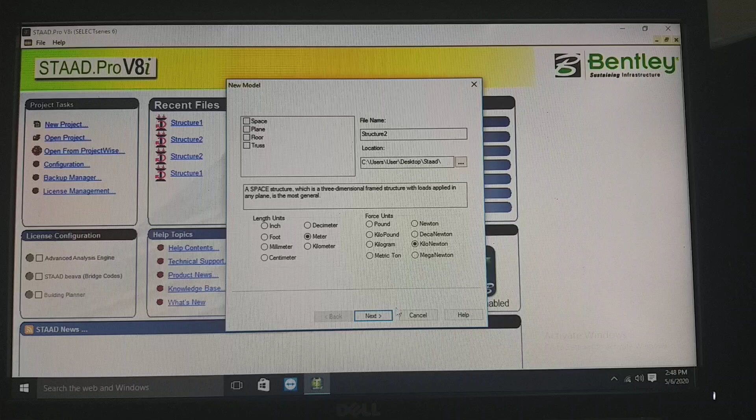First take the software STAAD file, new, we'll name it as structure 2 and save it in the same file which I have saved earlier. Change the units to meter, kilonewton, and take it as plane. Next add beam, finish.

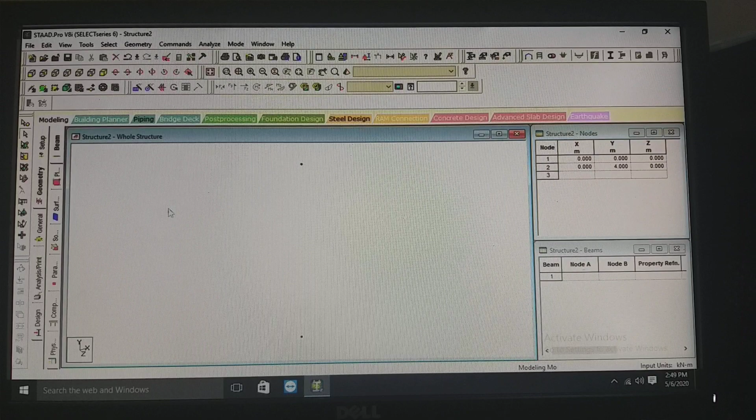First we'll add the nodes, at 0, then we'll add the second node at 4. Coming back, add the beams in between these nodes.

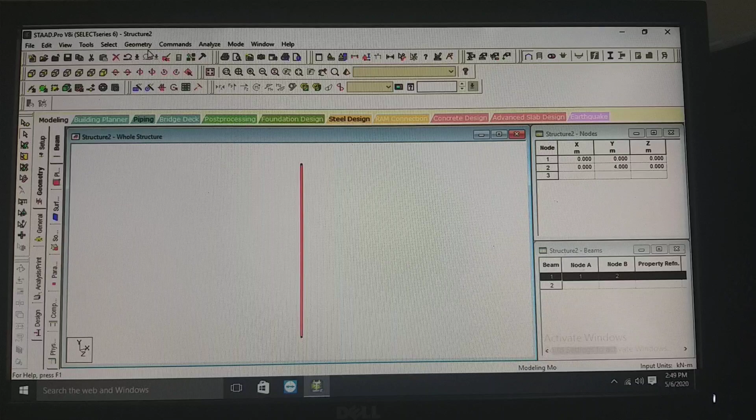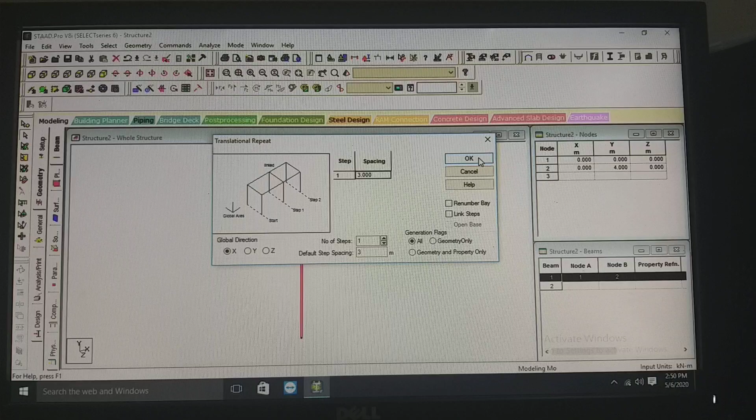Now in order to make this a portal frame, select and move on to the geometry where we have an option called translational repeat. Select the direction along x direction, the distance is 3 meters, number of steps in this, the spacing is 3 meters, default spacing 3 meters, number of steps 1, and give OK. So we get another node moving along the x direction.

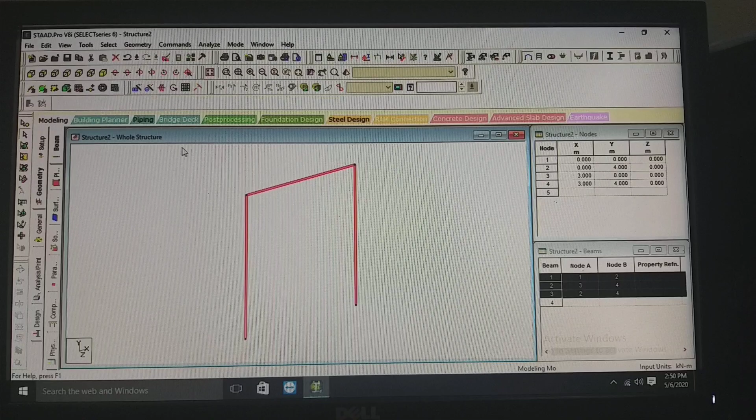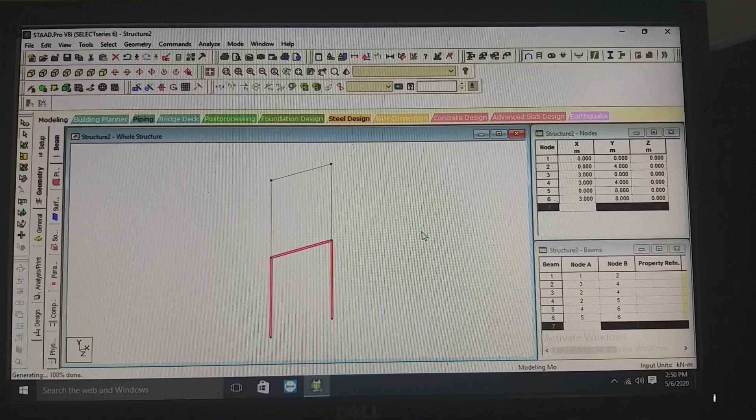Now join these two nodes, then select all 3 beams, use the option translational repeat. We'll move it along the vertical direction, that is along y direction. The default spacing is given as 4 meters, number of steps is 1, give OK. So you get another beam, another frame.

Now we have completed the geometry, then moving on to the general. First is the property, we have to define the property. So define a rectangular property, we'll have two different properties here.

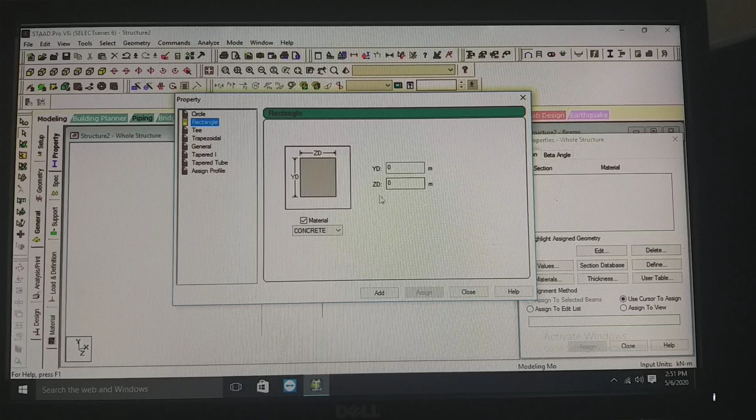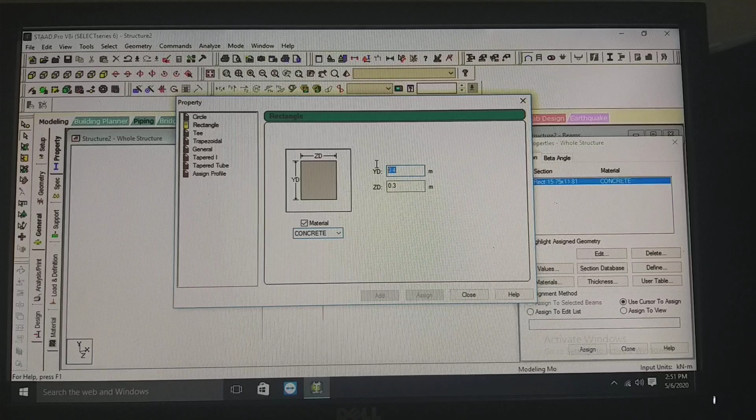First the rectangular property in which depth is equal to 0.4 meter and width is equal to 0.3 meter. Add another beam with depth equal to 0.6 meter and width equal to 0.3 meter. Add. Therefore we have two sections.

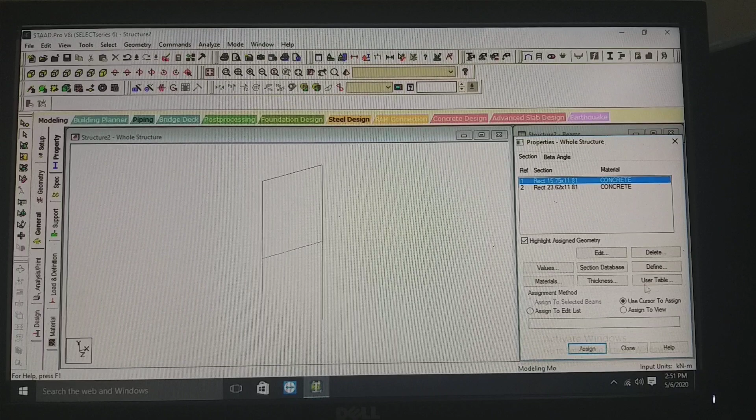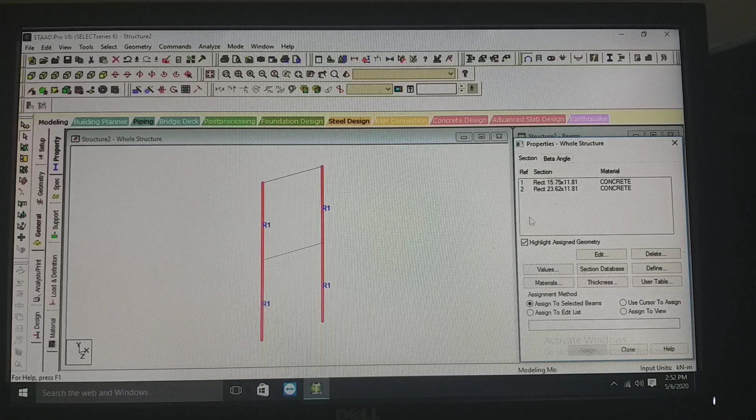First rectangle, that is the first section, we'll give it to the columns, that is assign, use cursor to assign for the columns. Then select the next one, will assign to the property, the beams we assign, use cursor to assign. We have assigned for the columns and for the beams. So the sections are over.

Now this is specifications, there is no particular specification. Moving on to the support.

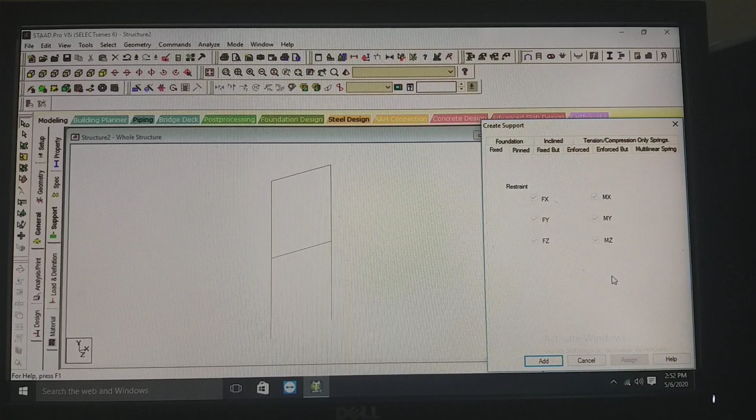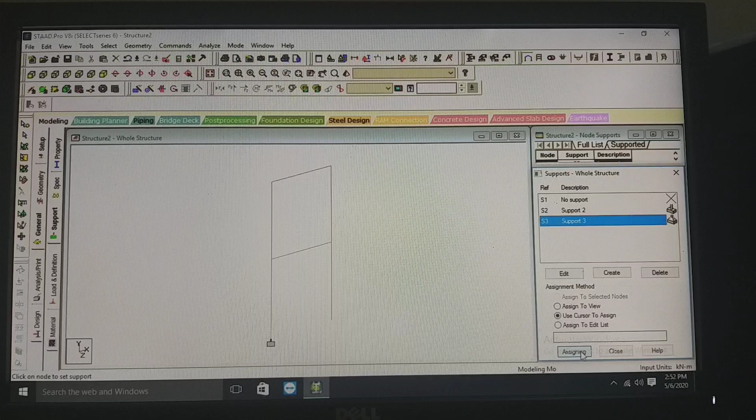We create two supports, create first a fixed support and next a hinged support, that is pinned. Add. So first is a fixed support, assign, use cursor to assign, that is a fixed support, and the next one use cursor to assign, that is a hinged support.

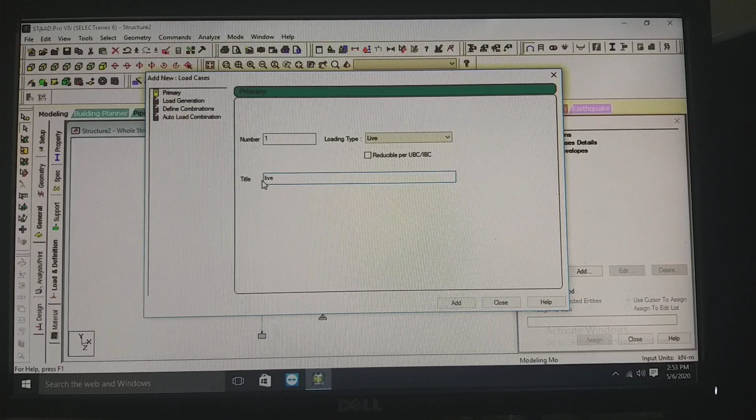Now after the support definition, moving on to the load and definition. So first load cases, add. In this, let it be live load. So we'll have load case 1, marked as live load, mark it as live. Add, close.

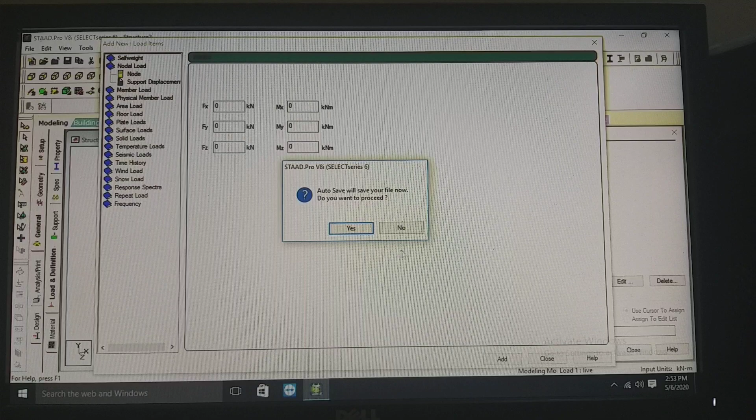So in the live load, add. First we'll have a nodal load, that is here we'll have a horizontal loading at the nodes. So in this case horizontal is Fx, Fx positive direction. We'll have a 20 kilonewton load, and we'll have another one along x direction, 10 kilonewton load.

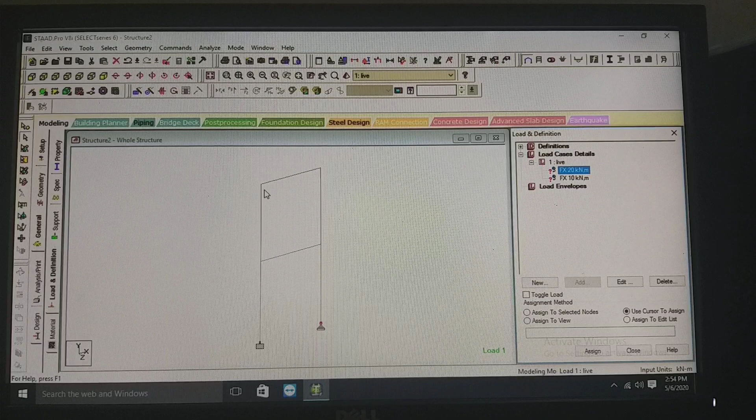And so we'll assign this first. Fx is equal to 20 kilonewton at the top node, and Fx is equal to 10 kilonewton at the bottom node.

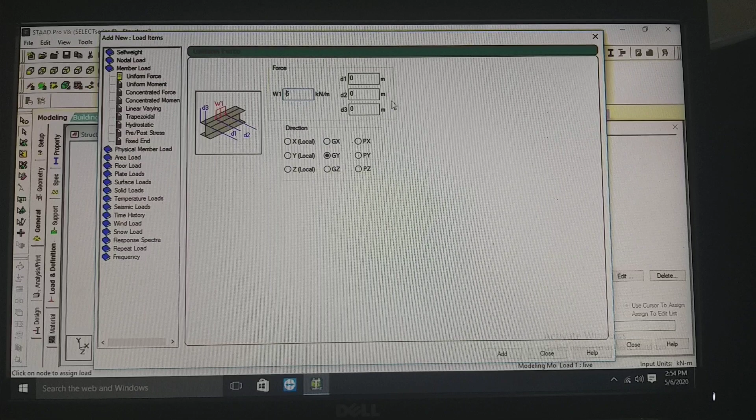In this case itself we'll define another load which is called member load, or you can assign a uniformly distributed load here, uniform force. Let the uniform force be 5 kilonewton per meter, and let it act in the global y direction, vertically downward, so we'll mark it as minus 5 kilonewton per meter. So with that, add the load.

Now assign this load at the top, use cursor to assign. So we have assigned a uniformly distributed load at the top member. So with this we have completed the loading assigns.

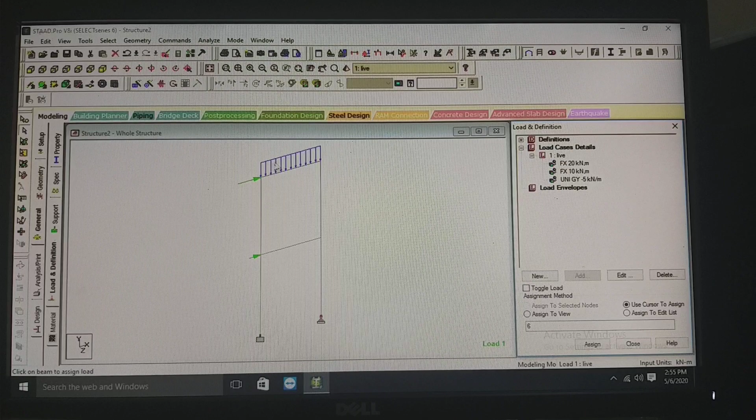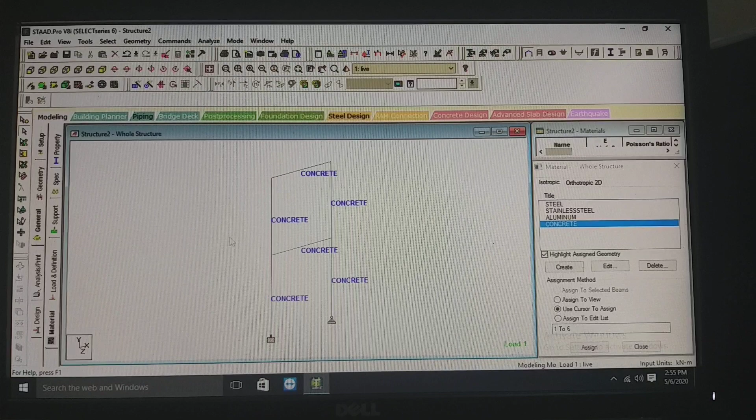Now moving on to the material, it has been defined as concrete. If you need to change the concrete, we can move to the concrete and edit the values, that is you can edit the compressive strength. For the time being, let that be the default value. So with that we have completed the section properties and the inputs which we have to give.

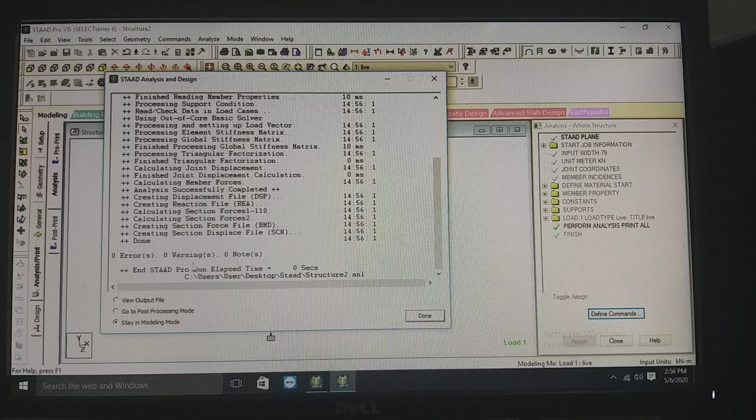Now moving on to the next one, analysis/print. So print option, print all, and so with that the analysis print option is also given. Now moving on to the command analyze, run analysis, save the structure, and we have seen 0 errors and 0 warnings. So staying in the modeling.

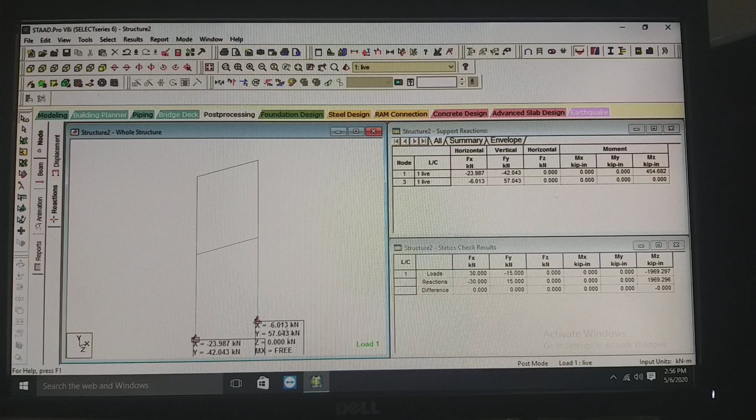Now moving on to the post processing, you have only one load, so you can see the displacements. The values are given here, horizontal and vertical displacements at all the nodes, and you can find the reactions on all the nodes where the supports are there.

Then when we go to the beam, we can find the Fx, Fy, Fz, that is the forces and the moments in the beams. And when you move for graphs, you can get the values of the bending moment, axial forces, shear forces, etc. for all the beams, that is for beam 1, for the 2 beams, and we can get the values for the columns also.

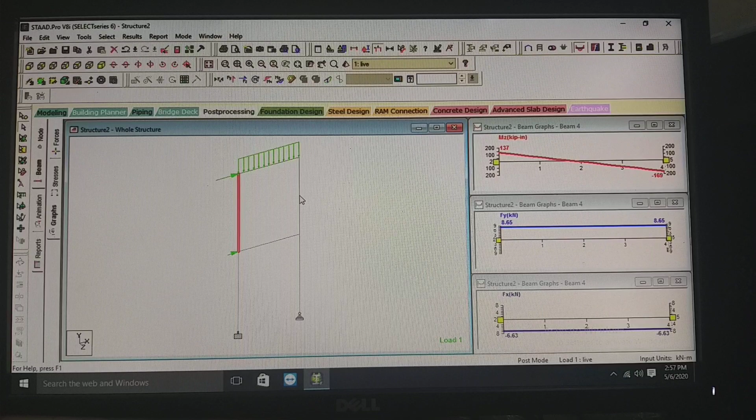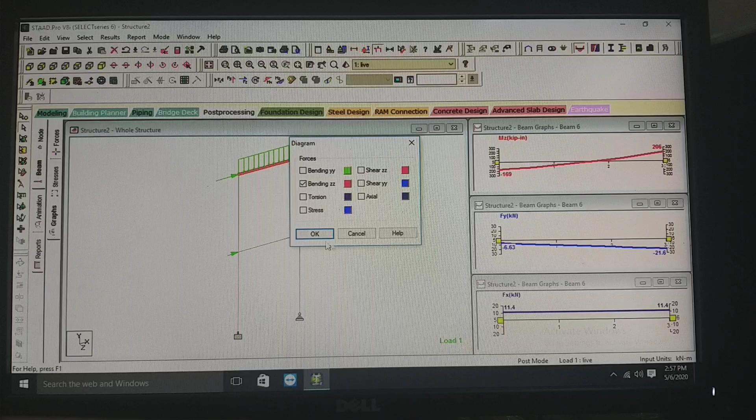We can get the values for beams and also for the columns. There are different outputs, that is you have bending YY, bending ZZ, torsion, stress, shear force along Z direction, shear force along Y direction, axial force, etc. You can find the directions for each.

So with this we have completed the 2-dimensional analysis, that is analysis of a portal frame.